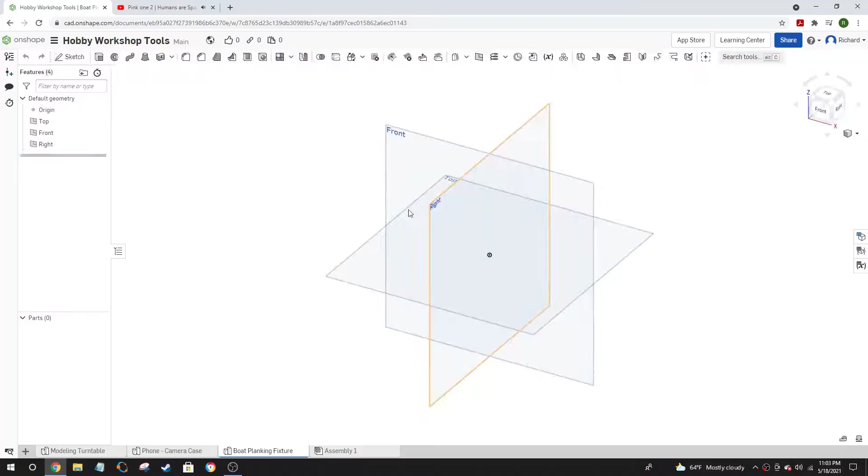And going along with that, as you can see, now I'm in that CAD program I mentioned using Onshape. It's basically a website that acts like a CAD program, so it's pretty cool. And here I am just designing outlines for various wood pieces that I'm going to put together.

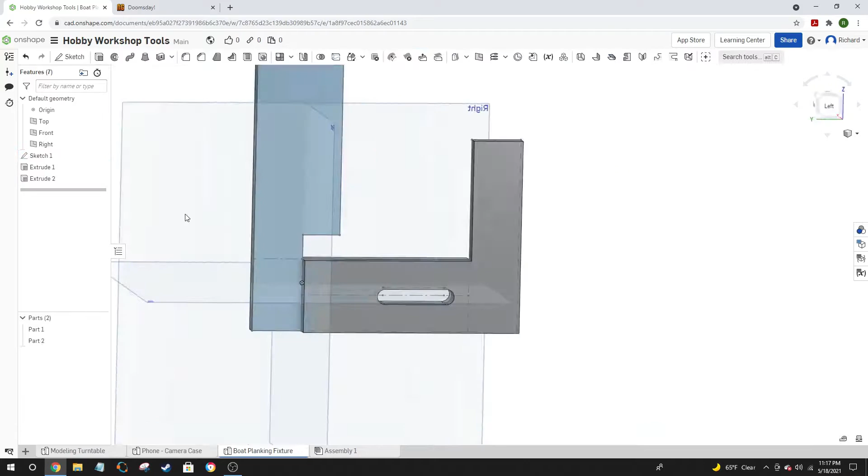You'll also see in the next bit, I got myself a scroll saw to cut these out. Now, this would have gone a lot faster and quite possibly more elegantly if I just ponied up and gotten a laser cutter, but those things are really expensive. A scroll saw - or no, sorry, I think it's a hand scroll saw or jigsaw, whatever it is - is actually quite cheap.

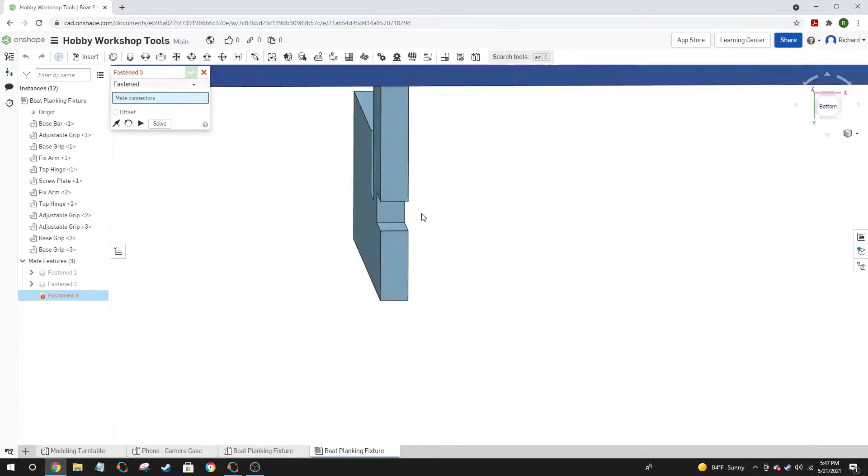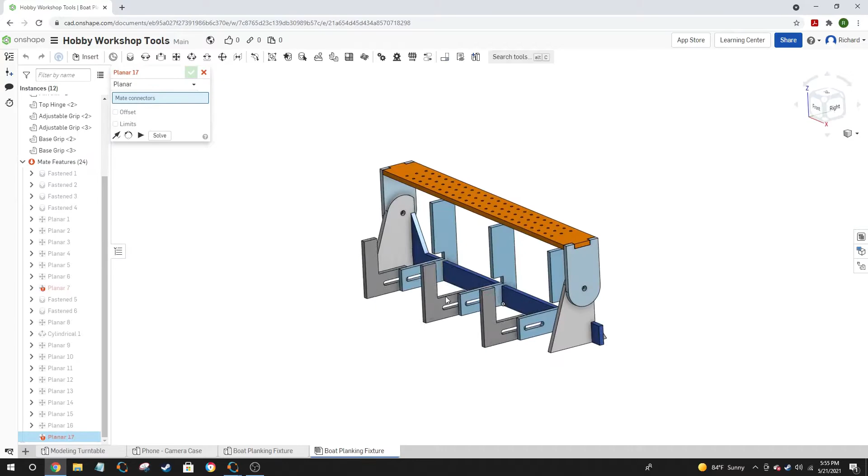And as you can see here, I'm in the assembly part of the Onshape program, so it does things a little differently. And yeah, you saw in that lower corner there's some hissy fit that my computer threw. Excuse me, I've got a bit of a cold and allergies at once, and it's not fun. Other not fun thing happened, but I'll discuss that at the end of the video.

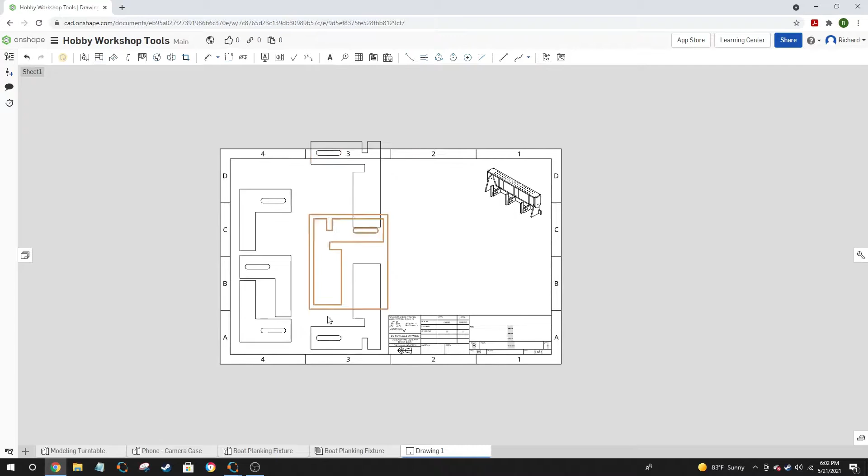So here I am now, going on to making a set of drawings for this thing. Hemming and hawing, I guess, as I'm looking at these parts. Eventually I figure out what I'm trying to do, I change some sizes of things, and then I get these pieces all to the appropriate orientation with regard to each other and everything else.

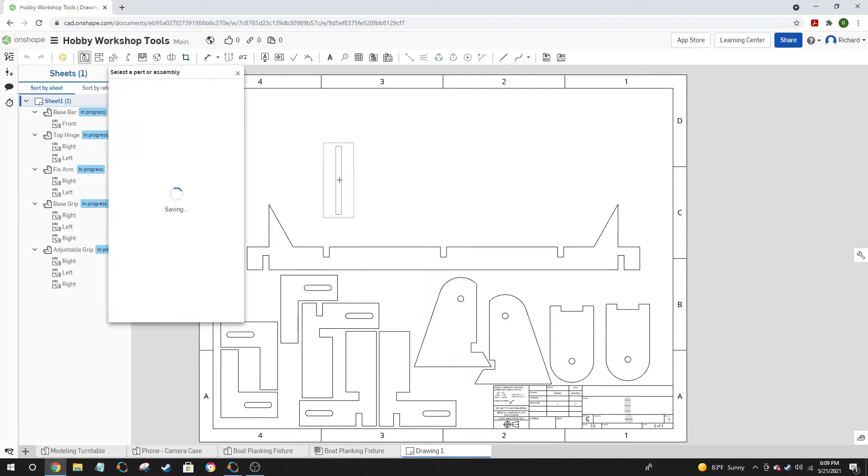Now the reason I'm doing these all in 1-to-1 scale and then putting them on a piece of paper is because I want to be able to use the pieces of paper I create for this as a template to put directly onto the plywood. And this technique works reasonably well, actually, as I'm about to discuss in the next time-lapse section.

Alright, so what you are looking at is a 2 foot by 2 foot by 1/4 inch piece of plywood. That is my new scroll saw. Figured Craftsman had a good reputation - hopefully it'll do a good job for me. So I'm going to clamp that to the table, and I'm going to do some scroll sawing. But what am I going to cut out on?

Templates! Alright. Next time you see this thing going, it'll be me cutting this up, probably.

Alright, oh nope, I guess I show the process of securing it to the table first. So yep, I secure the thing down. I did this initially at night. I cut down the template to size, spray a lot of spray-on adhesive, and then push the thing down, trying to get it even without air bubbles. Look at the thing then to see just how bad it is. Then I get the scroll saw ready - or jigsaw, whatever the hand saw thingy is. I don't know the exact names for these tools, I just know that they work.

Alright, here's the normal speed section. As I'm checking to make sure that's about in my view, give it a little further tweak. Perfect. Okay.

I don't hear any screaming from the wife. Neighbors haven't thrown a flashbang in yet. I guess we're fine. Okay, here we go.

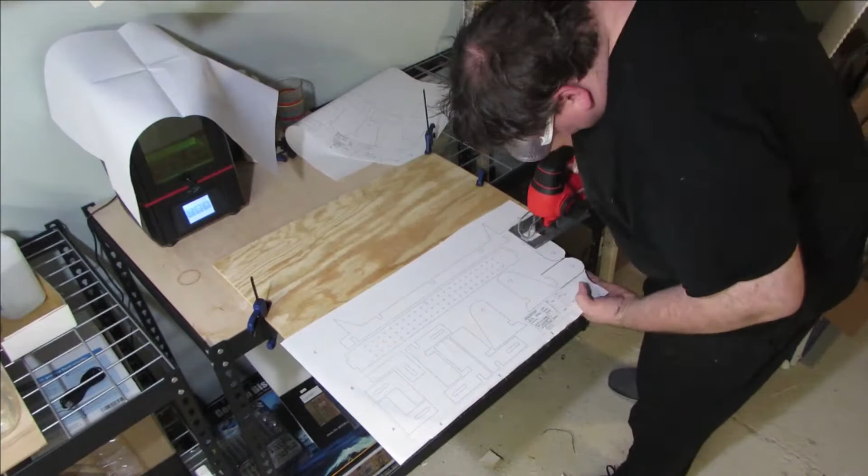More of this, and more we do. I'm just using the scroll saw to cut things down. You'll see a jump in the clip, probably a change in shirts. It's still tail end of the corona thing, so no one's really wearing clothes right now. Anyways, just scroll sawing along. I wish I had a better setup for the camera, so that's why I put it over there.

Hey, well, I did change the shirt. The wife came about a few moments later. The reason I didn't hear her scream is because the thing was too loud. But yeah, so I waited till daytime to continue the cutting.

I'm just following those lines with the scroll saw, trying to get as close as possible while it's nicely holding on to everything. Then I end up abusing this little jigsaw thing, going around, making some cuts. I end up cutting some other things sharp where I need to, and then just refining cuts. I do use that scroll saw and sometimes the drill bits.

To get the little tabs and grooves that I had everything line up with together. I think I must have gotten slightly thicker plywood than I had originally designed for. I designed for 1/4 inch thick, and I thought what I grabbed was 1/4 inch thick, but I think it was a little thicker. I could go measure it, since I still got the thing in my shop somewhere, but meh, no need. Spoiler alert, didn't work.

But hey, I learned a lot about how to use the scroll saw, so that's a win. Anyways, going on, refining the shape there, getting it a bit more refined still with the help of those 2 clamps, making everything fit. You'll see a lot of little fitting of things in like that.